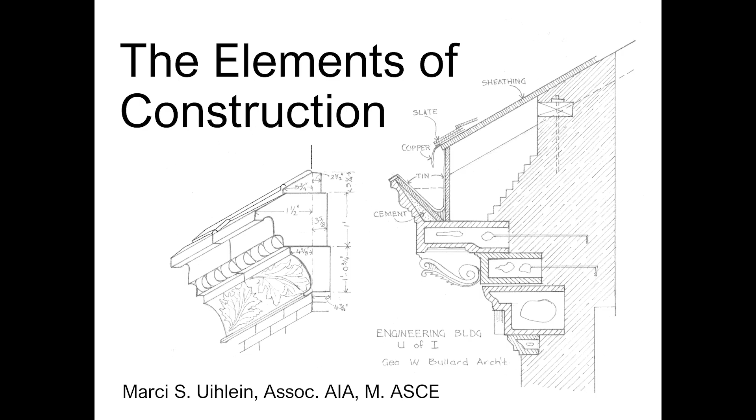As you know, we have this semester our lecture series. It's called Critical Practice. It's a continuation of the last semester. And we are pleased today to welcome somebody that everybody here knows. My presentation won't be long, but it's important to recognize Professor Uihlein.

She'll be today presenting some really exciting work that she has been doing, which is the publishing of her latest book, The Elements of Construction, looking at somebody very prominent in architecture, but also very important for our school, Ricker, and the process that he took to change and talk about what architecture education is, and then also give us a history of what we're studying today.

So it's important to bring this history out into life, have this conversation, have this presentation. And it is incredibly important also to give the stage to somebody who has taught many students, which is fantastic, and continuing this presence of construction history in this school. So Professor Uihlein, as you know, is associate professor here, and also the associate director for research. So also us as faculty very much learn a lot, and she has been a great asset for all of us.

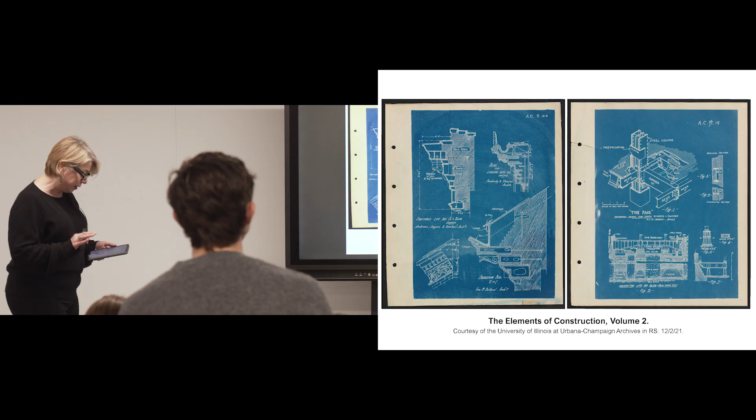The first is William LeBaron Jenney's Fair Building on the right, which opened in 1892, the engineering building, which was dedicated on the university campus in 1894, and then the better known Manhattan Life Insurance Building was 1894. So we know that at least the version that we have is 1894. So the date of this is significant because there's lots of change going on in Chicago and in the construction industry. And so Ricker, as the good educator he was, had to try to incorporate everything within this textbook.

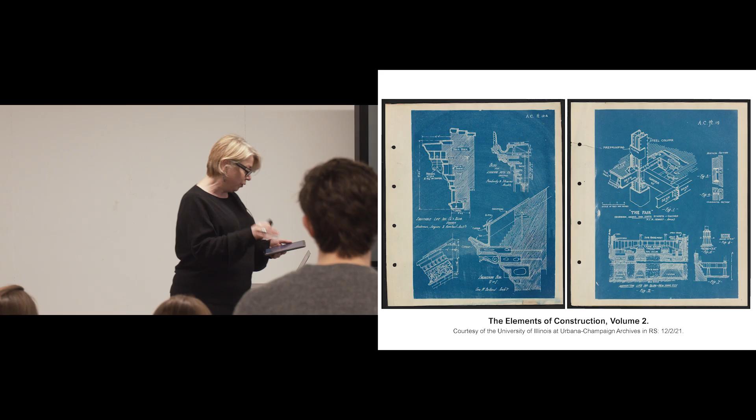And the textbook was intended to aid future architects who were designing in rural areas, he would mention Iowa, but also quote unquote important buildings in the city. And so the textbook reflects this remarkable moment of construction technologies being tested and new knowledges being created. The first volume, which is not of my book, but is important nonetheless, is Strength of Materials. So for those students I have tortured, this is the kind of stuff that Ricker was teaching in the 1870s. The first volume also contains wood, and you can see here a diagram for a wood roof, carpentry, joinery, stairs. It also built on the topics about shop practice that we taught here for years, which I'll talk about later.

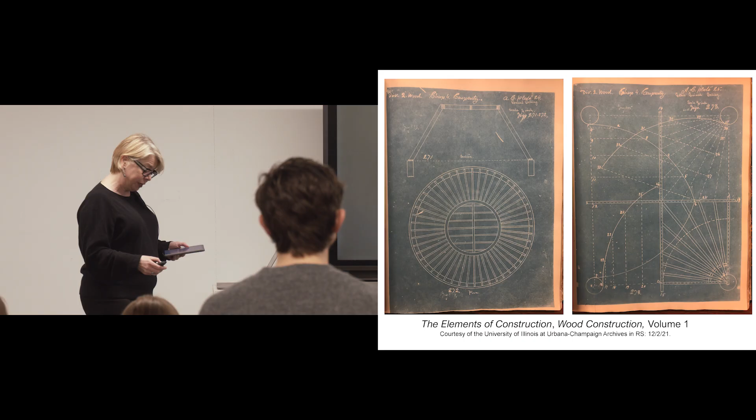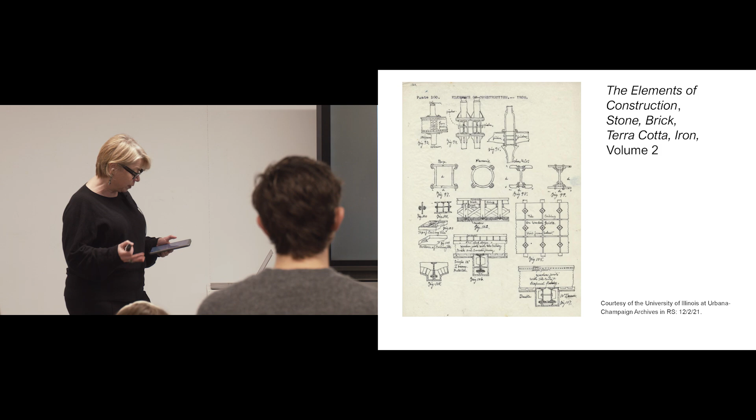So Ricker's textbook was constructed through something called the blue process, right? And so this is actually a negative. The negatives were composed on trace paper with ink or typed. This page was then put on top of another page that was chemically treated and that would sit in the sun for 2 to 3 minutes at a time to print it, which is amazing as we think about today. So a university document talks about this method. The document was from 1881 and said that we began to use this method in 1878.

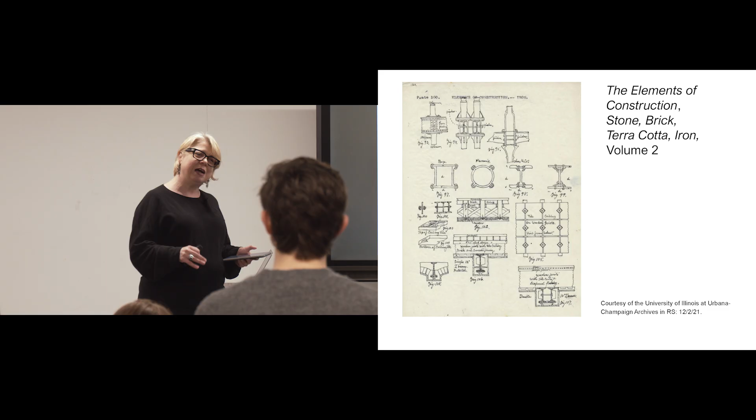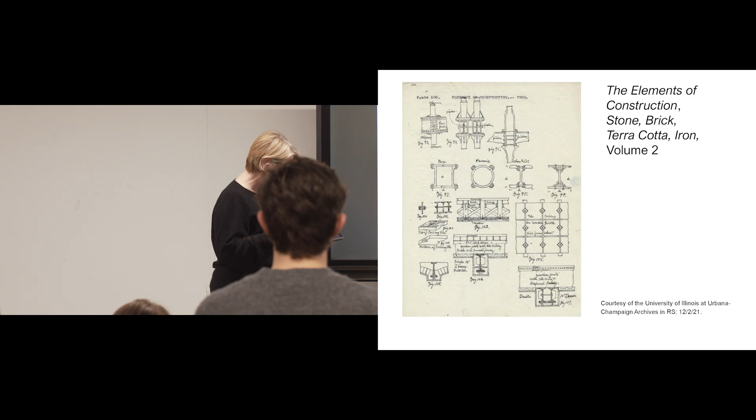Architecture was an early adopter, but by 1885, 30,000 pages were being printed a year at 2 minutes at a time in the sun, right? And so the University of Illinois had departments such as zoology and military sciences using this besides us. And so this is the blueprinted version, and I have a photocopy of it. I'll pass it around in a bit.

The benefit of printing this rather than publishing is that it could be updated annually. It could be updated regularly, right? And so Ricker would say, fresh and abreast with the progress of science, including the latest construction details or translations of scientific work. The blue process thus allowed students to gain the latest information at a speed that kept up with the changes of the construction industry that were happening with the introduction of steel and ultimately the formation of skyscrapers.

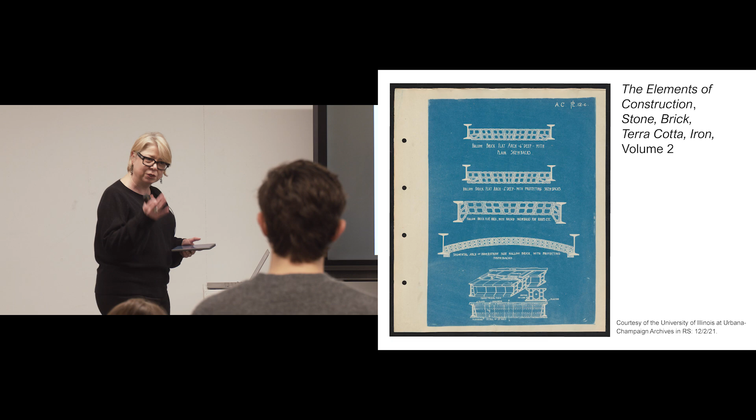The sources for the information were timely, but it also meant that this work was never published. It was never static, right? So it was always changing. And so Ricker did and could update it when he liked. And so the book, the second volume, which is the focus of the book here, had these divisions: foundations, stone and masonry, bricks, terracotta, tiles, and terracotta, which of course was important for fireproof construction, iron, and you'll notice steel construction, right? So he's mentioning steel construction in that title.

So for each one of these materials, Ricker does Ricker. He's got the what, why, how, and so what of each material. So he's talking about subtypes of materials. He's talking about types of mortars, cements, what might influence an architect in their use and their choice, and he even draws out tools to be used in construction. There's a whole page on stone cutting tools.

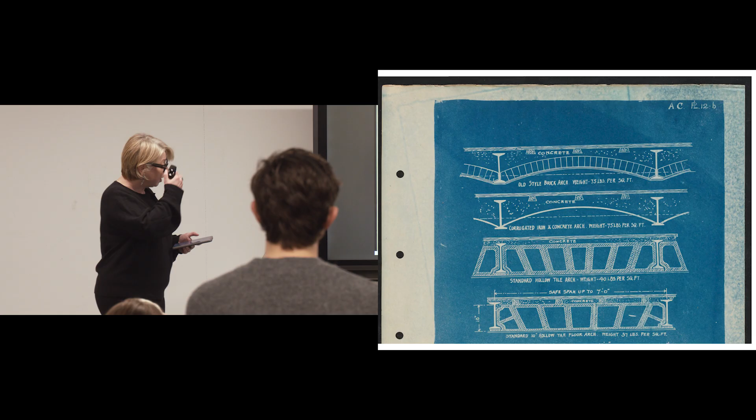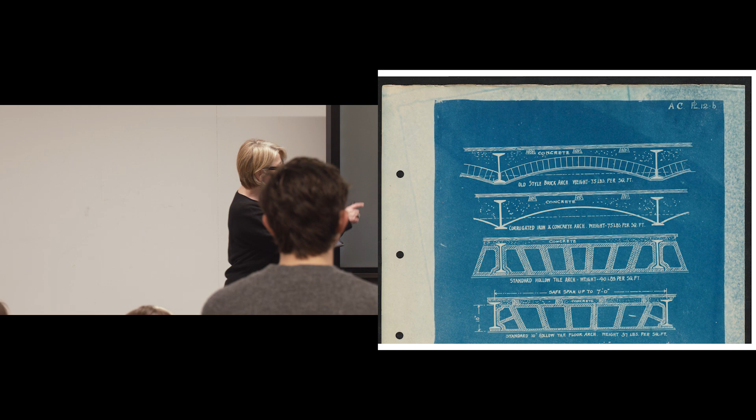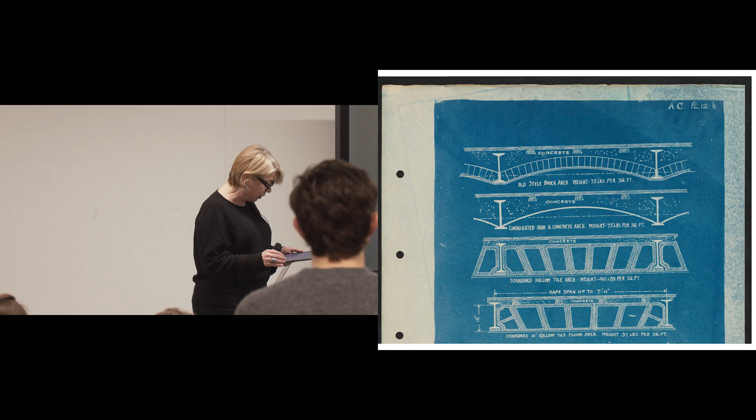So the plates accompanied the text, so there's a series of plates, and so we'd have stone cutting tools, stone masonry forms, brick coursing, iron and steel forms on a series of about 20 plates. So just as the text could be supplemented, so could the images. And so you see on the top we have 12B. So this was inserted at some point. He also removed several of these, right? And so what's remarkable about this volume is it encapsulates how buildings were built at the time when everything was changing, including construction and how we educated an architect.

So why was construction important to Ricker? So let's look at the man, Clifford Ricker. So he was born in 1843, died in 1924. He was one of the early educators in the entire United States. His role at the University of Illinois began in 1873. We'll talk about that in a minute.

And when he retired in 1916, he had served as the head of the School of Architecture for 37 years, dean of the College of Engineering for 27 years, and the chair of the Illinois State Board of Examiners for 17 years. So while leading the School of Architecture during his tenure, it is estimated that he educated a quarter of all architecture students across the country at the time. It should be noted that the University of Illinois was the only architecture school outside of the East Coast until the 1890s.

Ricker was born and raised in Maine in a farming community that he said allowed some but limited education. He noted having few books to read and none to borrow. He attended both his family farm and worked on a family mill. He learned in school and on his own. He had a habit of studying at night and educating himself. This allowed him to gain expertise in subjects like Latin, biology, and geology.

He further developed skills in his work with wood. So he had a position in a factory that made piano cases. He performed carpentry for building construction, and he co-owned a blacksmith shop. And so Ricker described the blacksmith shop as hard but practical labor, fixing wagons, carriages, and farm tools in La Harpe, Illinois, Western Illinois. In 1869, Ricker met a student from the Illinois Industrial University, the original name for our university, and heard of this student's experiences. So then he sold his shares in the wagon shop and headed off to the University of Illinois.

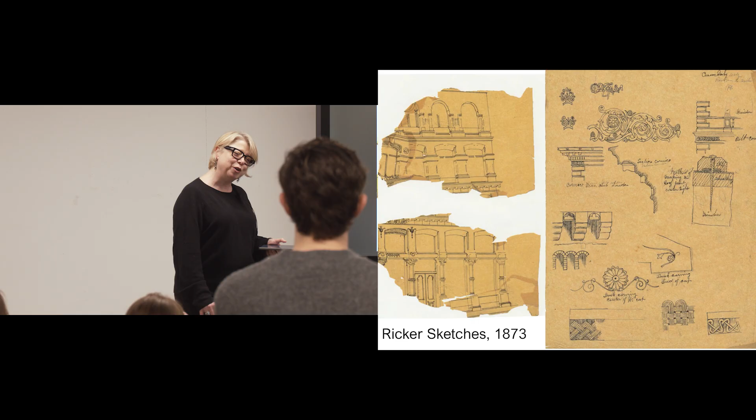I love this. However, before he became a teacher, he had to visit Europe. Regent Gregory wanted him to visit Europe. So Ricker and Gregory sailed for Europe in March of 1873. The Bauakademie is his first stop in Berlin, right? And so there's conversation about whether Ricker is following the Polytechnic model or the Beaux-Arts model, and he clearly has affinity with the German model. And this choice is actually because Hansen was trained at the Bauakademie, so there was some inspiration to go there.

Ricker also went to Vienna, Prague, Dresden, Paris, Glasgow, and London. During this trip, importantly, Ricker attended the 1873 Vienna World's Fair, where he noted the technical education through shop practices exhibited by Russia and Victor Della Vos. As Gregory had hoped, the European experiences had influenced Ricker and his approach to education. Here are sketches on trace paper from that 1873 trip, right? It's like all the people you know in Barcelona now making sketches in a sketchbook. We've kept these since 1873.

And so upon returning to campus in 1873, Ricker became the permanent instructor, and he was the only faculty member until 1891. And so within his first term, he revised the architectural curriculum. In addition to his administrative and teaching duties, he designed 5 buildings on campus.

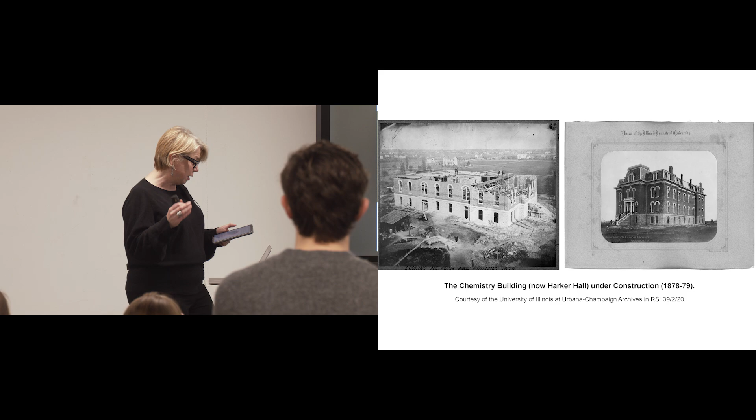Now this is the chemistry building, now Harker Hall. And from his accounting, even as a student, he had used his skills in the wood shop to improve campus conditions as a student and as an architect. And of course, Ricker was a lead on the Altgeld Hall, our famous hall. Of this project, Ricker said, except for the mosaics, architecture students and architecture department had everything to do with this building.

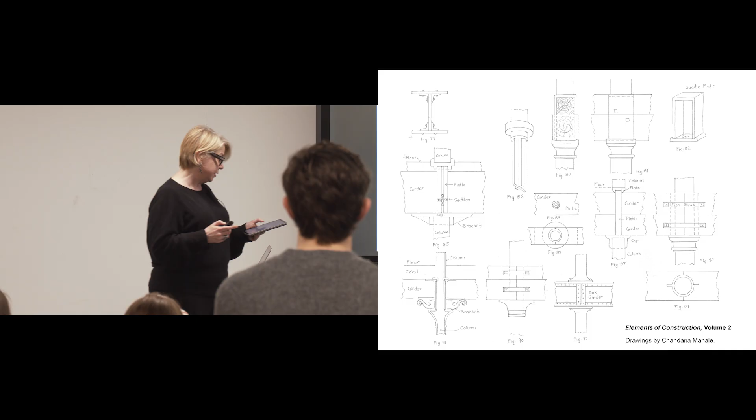Ricker believed that one had to learn the elements before they could advance their skills in architecture design. Construction knowledge was essential to protecting not only the public safety, but the integrity of the profession. As an educator, he thought it was his responsibility to implement these values. Underlying some of the emphasis on construction was Ricker's belief that he served the university, the state of Illinois, and the students themselves. Ricker was rather plain-spoken on the subject and noted it was his responsibility to train all students for a career.

The state, he said, had the right to demand the proper training of their sons and daughters, and students deserve training in some useful pursuit. Knowledge of construction, structure, heating, and ventilation systems provided this background, Ricker thought. And so we have the courses themselves, but we also have written descriptions of the program for future students that Ricker would have written, right?

And so the first goal is full and thorough knowledge of scientific principles of construction. We're going to notice the emphasis on scientific and how that reflected the growing belief in the power of science at the time, and would have supported University president John Milton Gregory's vision of the university to use the new era of science to enlighten industrial classes.

The second one was the focus on practical skills for the profession, drawing specifications and estimates. Design and drawing buildings were essential preparations for those entering the profession of architecture. And the third was practical knowledge of construction in all its forms by a full course in shop practice. Through shop practice came comfortability with acquiring skills of the trades. Ricker thought construction methods and construction means and materials were of a place and of a knowledge that could lead to development of American architecture while serving the growing profession.

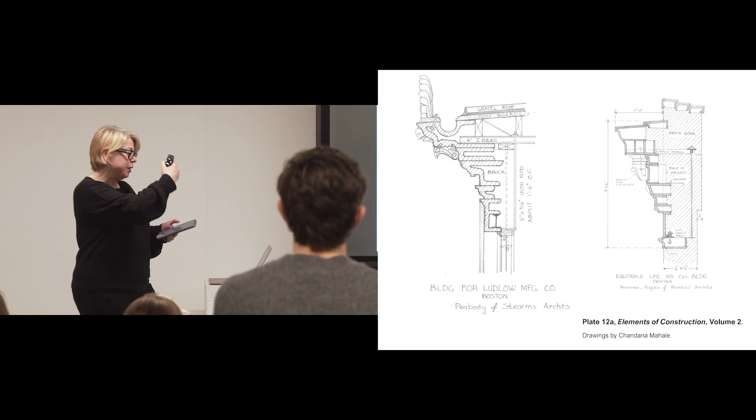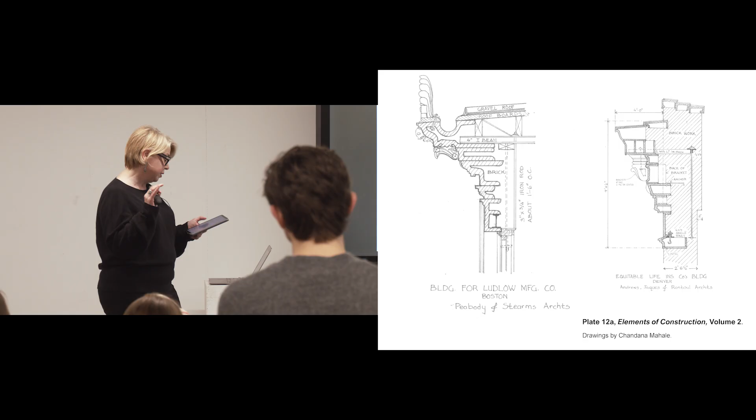Simultaneously, Ricker had been serving as dean in the College of Engineering, and he saw that architects had to be technically trained because engineers knew nothing about buildings. And so, controversial as that may be, Ricker's guiding principles led him to instill construction, structures and materials as defining characteristics of architectural education at the University of Illinois. So besides being able to draw a detail for every portion of the building, Ricker believed that there was beauty that could be found in the systems and that the systems contributed to the overall design.

Other institutions provide further distinction about why Illinois was different than what was happening at the time. And by 1888, there were 6 schools of architecture. The first 5 were established, and university education for architects was in its second decade, right? So previously and even at the time, apprenticeship remained, but the American Architect and Building News declared that the advantage of school training for architects had become generally appreciated, and the time is quite right for the university to take its position that graduates must be thoroughly equipped to rise to the highest levels of the profession.

And so in the same year, in 1888, the American Architect and Building News ran a series of articles, you see one here, about architectural education in the United States, and they analyzed MIT, Illinois, Cornell, and Columbia, and they provide interesting details that we can't find in curricular descriptions today. The programs at MIT, Columbia, and Syracuse incorporated trips to building construction sites, access to professional offices.

Ricker also often lamented about this, that the students of Illinois, in the center of the cornfields, as we are now, did not have access to first-class city buildings, and thus the character of the program had to be different. Architecture had better come to the university through their instructors, images, and books.

Knowledge of science was an important component of the practice of architecture, and was incorporated in each of 5 of the programs, including Syracuse, which was an art-based program. Strength of materials, mechanics, roof structures, heating, and ventilation were addressed at all of the schools at some point at this time. Illinois was different from other schools due to a number of hours and dedication to construction education.

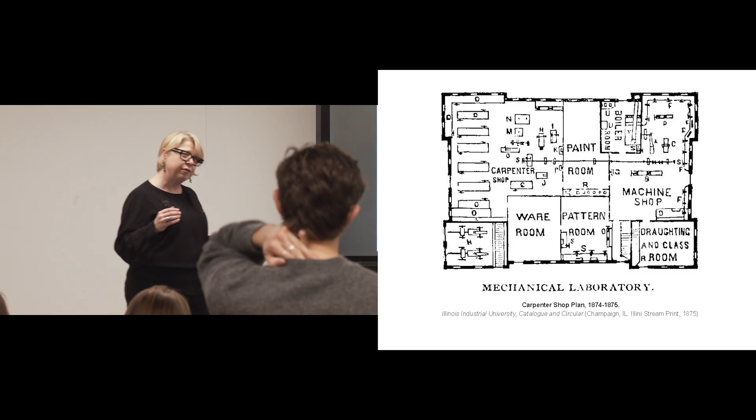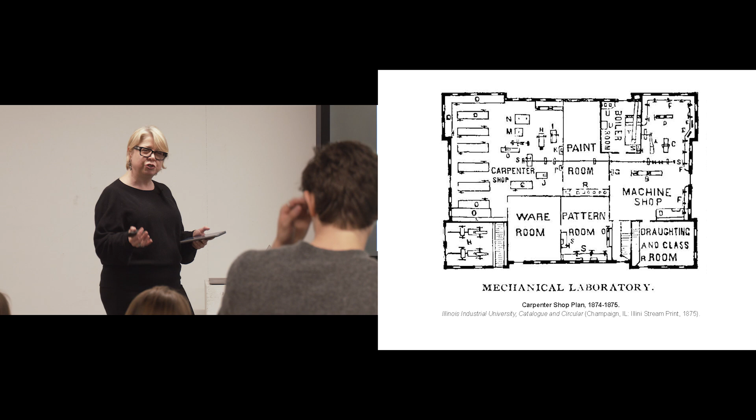And so the shop classes themselves would be hosted in our carpentry shop and what was our turreted building that no longer exists. And so this was achieved by making an object with proper tools and materials repeatedly, and this is a method that he got from Della Vos at the World's Fair in Vienna. And it was a learning process to help students refine their abilities and conceive what could be built. If you understood the material, then when you drew your detail, you knew how to draw that detail.

Remarkably, we have over 40 assignments that exist from these 3 classes, which is amazing. And so for the first term, we have almost a complete set, 1 through 25. They appear mostly to be in Ricker's hand, although not all of them. And so one of Ricker's contributions here was to make the students work off of drawings, because he said if students were drawing drawings and communicating to the contractor, then they should be able to read their drawings and build themselves.

And so the very first assignment is planing, right? And so you can see that we're building up. So you're going to make the thing until it's approved and it's correct. And so we have the instructions, and we list off the tools as well. And then so that was 1, and this is now 20 for the first term. And so by the end of the term, you're constructing molding. And it increased with difficulty along the way until your second term, you're creating a newel post, right?

And so we don't have the remaining work, like I said, for the last one. But we do see that the shop practices were part of Ricker's curriculum and thinking about education, and they were taught in conjunction with the construction classes and Ricker's theory of textbooks. So I know you all think you have a lot of structures and construction classes now. This is what you would have taken in 1888, right?

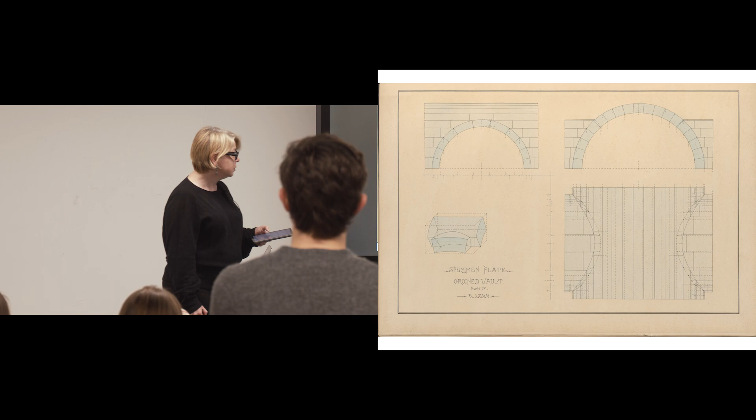And so it is through assignments. We also have bunches of assignments that exist in the archives. So it's an assignment like this that would pull together the theory, the shop ideas, into a drawing.

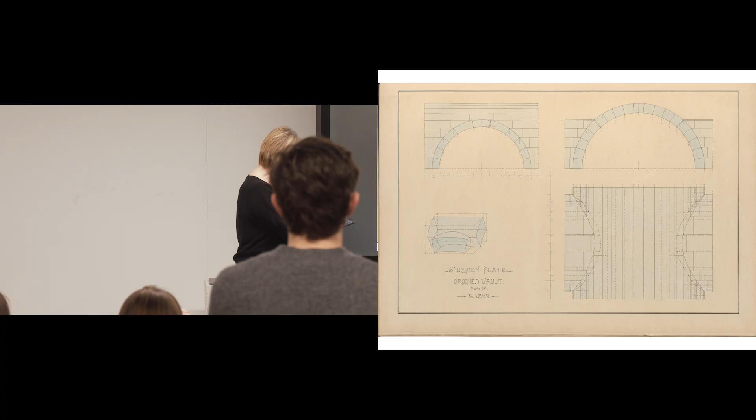So Ricker's influence, however: we've talked about his influence as an architect, as an educator. He also influenced what was happening in Chicago. Ricker went up to Chicago quite regularly. We know he was in touch with people there. And we know in Chicago, some debate, but this may be the first skyscraper in Chicago in 1882, right? And so we know when Ricker is teaching, the world is changing quite rapidly.

And so the complexity of buildings increases, the construction materials and innovation change, and even blueprinting starts. And so no longer do we need to hire people just to draw, right? So those skills were needed, but more than what people could do as drawings. And so training provided a greater number of practitioners, but Ricker's belief is that it needed to be rigorous. So beyond the intellectual ability, there needed to be a way to ensure that those calling themselves architects had sufficient knowledge, right? And so huckster was a word that was used quite a lot at that time.

Ricker saw the challenge. This is a challenge to the profession. He was deeply protective of the profession and of public safety. And the lack of construction knowledge was not only dangerous, but diminished the standing of the architect in the public eye. Thus, it was only natural when a licensing law for architects was proposed in Illinois that he supported it. And so Illinois was the first state to enact a license law, in July 1897.

Among the other requirements, such as exams and sealing drawings, the Illinois law required the Illinois State Board of Examiners of Architects, and here we see a photo. The board was to be composed of five individuals with either over 10 years of practice experience or someone that belonged to the faculty of the University of Illinois. Inland Architect, a famous journal, famously said, we need men of undoubted integrity and the most esteemed for designing and structural knowledge. It should be pointed out that Ricker understood that licensing wasn't going to get you better buildings. He said if you wanted to design an abomination, you could still do that, but it meant that the buildings weren't falling down on people.

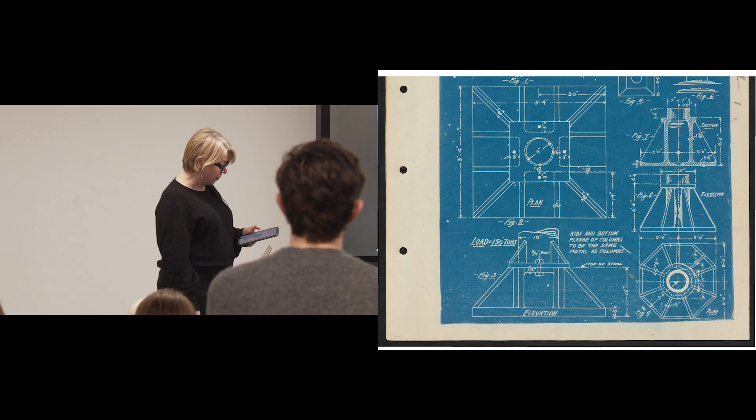This book would be plans, sketches, strength of materials, proportioning, and the proper use and management of materials. Ricker and Hatch indicated in 1871 that such a work did not exist, only that the books were too general, too full of product advertisements, and too theoretical. With such a book, they said, architecture would see its rightful place among the highest of arts, should it exist. And so in 1871, he's already dreaming of this book, and we see this book manifest itself in Ricker's Elements of Construction. And so here's a foundation detail, an example of the drawings here.

And so a great and distinctive American style can only be produced by the method of evolution in accordance with our materials, constructions, requirements. This method has been thoroughly successful in the case of the American house and the office building, and will be equally so with a new type of commercial architecture, i.e. skyscrapers in Chicago.

So construction was always important to Ricker, and he taught the subject through rigorous architectural education. He tested it through examination boards. He saw the importance in construction. The 1871 article shows that Ricker notably sketched out the need for a construction education as a student, and he would spend his life implementing it. The volumes of Elements of Construction illustrate his rigor, attention to detail, and knowledge of contemporary architectural practices.

It's also the idea of how do you build when the world is changing around you? You cover it all, he said. These volumes, like his pedagogy, are evidence of his leadership in architectural education and the architecture profession. How a building is built was essential to public safety. More importantly, it was the essence of American architecture.

By the time that Ricker retired in 1916, construction education was in a form that we recognize today, right? So if you go through here, and we've all had a construction textbook, you look at it, that was what was happening in the 1870s. Ricker's endeavors as a teacher and a lover of the profession had 80% of his students having careers in the building industry. And really the structure of his curriculum resonates in the school today, right? 150 plus years later.

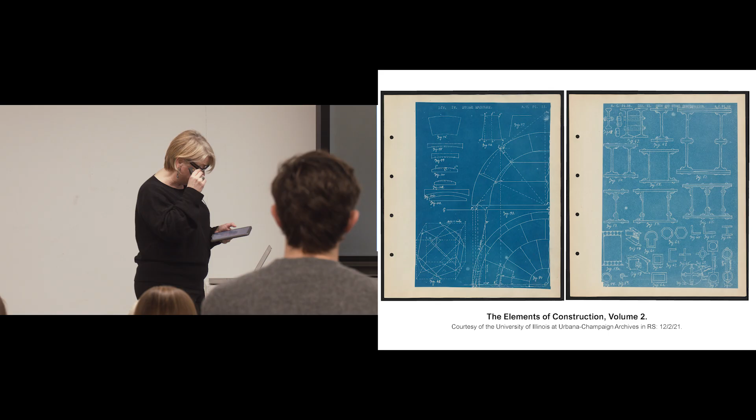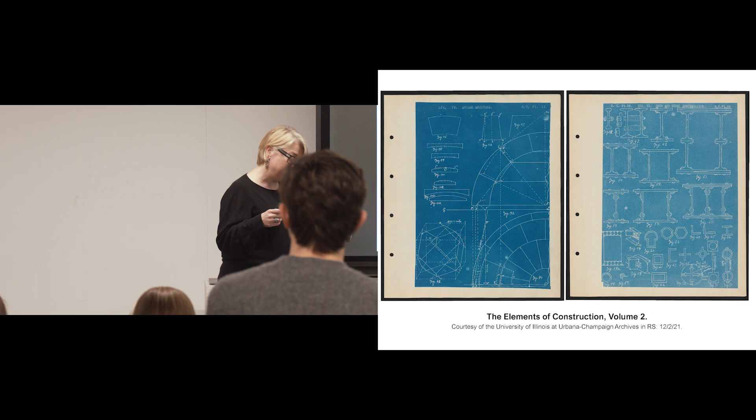Henry Bacon, the designer of the Lincoln Memorial in DC, and whose only architectural education was at the University of Illinois, reflected on Ricker at Ricker's 50th anniversary at the university in 1922. Bacon noted Ricker's long distinguished career, but more importantly, congratulated him for being a bearer of light to those who follow. So as I wrap up, I want to say a little bit more about the book itself.

I have the book, we could pass that. Actually, let's do that. In this book are the stories that I've started to tell you about Ricker. We published the construction textbook, which I'll pass around as well. And there are several chapters by these very fine authors on the right, one of which is in the room, Professor Thomas Leslie. And what we did is we asked these authors to help us contextualize what was happening at the time.

And so we have chapters that put what's happening in 19th century construction in Chicago. We have something on education, the state of the skyscrapers. Tom Leslie talks about foundations, we kind of didn't really know. And then for masonry, Rachel Will talks about standards of materials. So Ricker would literally talk about how you could go up and tap a material to hear if it was good or not. And so those standards will later become incorporated into things like the ASTM standards that we use now.

For the steel section, Friedman identifies the time capsule nature of the work. So if you imagine, there's cast iron, there's wrought iron, and there's steel, but architects were using all three of those still at the same time this book was written. And so our expert in metal construction says within that chapter that he can see texts that are written in the 1870s, and he can see the text that was written in the 1880s. And so all of these chapters really help contextualize the contribution, and are individual and amazing contributions on their own.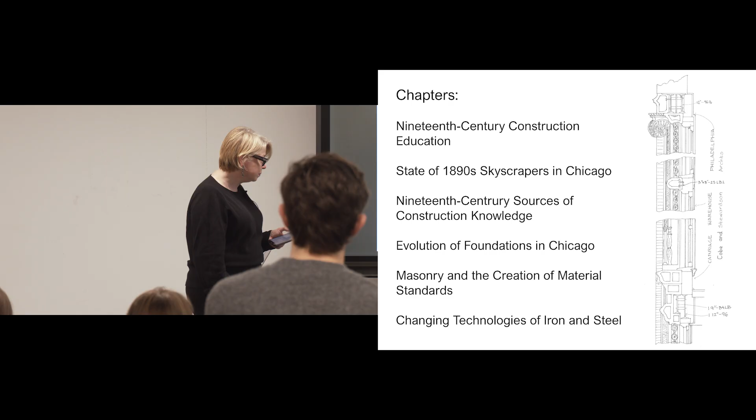And so with that, I will let you know I have bookmarks for all of you. Have you passed them? Okay. This is for all of you. And then we have the book going around. And then I also have the photocopy of the original text. So if you want to see that, you can see that too. And you'll notice all my tabs are what I used in the proofing process.

So with that, I will open it up. Thank you for your time and letting me share this story. It's amazing, so Ricker in the 19th century was on the cutting edge, right? Even in the middle of the cornfields. And I'm happy to take any questions we have time for.

Yes? So this is fascinating, and especially to derive this from the slide that you showed, how much construction technology the U of I had versus MIT going out like this. Yeah. This runs very parallel to two generations later in architecture at Bauhaus. Yes, yes. Very much so.

Yeah. And Collins, in Changing Ideals in Modern Architecture, talks about how even as early as 1840, there was a call for what's the new architecture and what's the American. So he seems to be right at the heart of all these different aspects. So I guess the question that I have is, was there anyone else who was doing what I always considered Bauhaus's innovation?